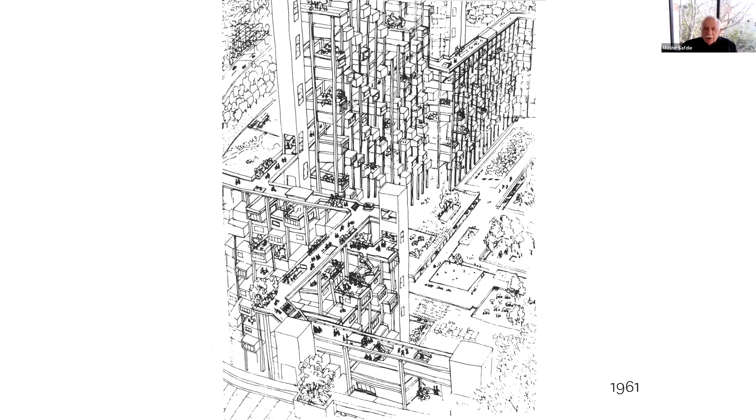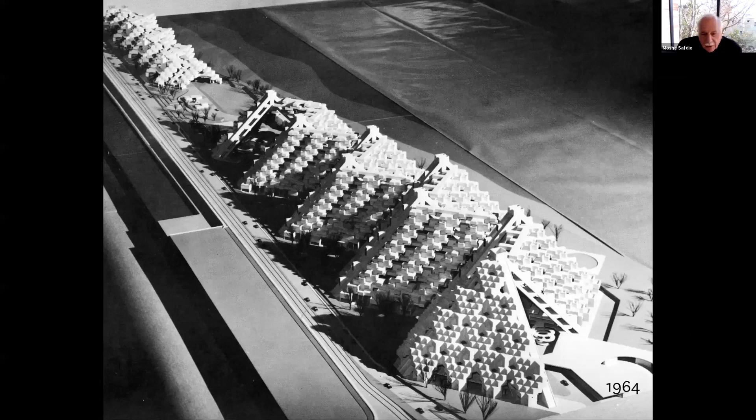I'll fast forward. After being briefly employed by my thesis advisor, Sandy Van Ginkel, I proceeded to Philadelphia to work for the great American architect Louis Kahn. While I was working there in 1963, Sandy Van Ginkel shows up and says there's going to be a World's Fair in Montreal, and he'd like me to come head the team that designs the master plan. I accepted, and with a bit of nerve said, I have one condition: I want to continue developing my thesis. Perhaps it can become an appropriate pavilion for the World's Fair.

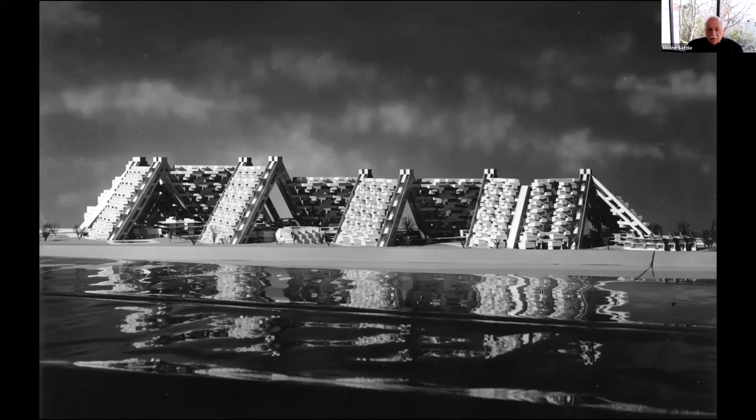I returned and worked on the master plan, and in parallel, using funding from the cement companies, working overtime at night, we developed the original habitat proposal, which you see here, of the entire Cité du Havre in Montreal becoming a community of 1,200 families, rising 25 stories in a series of inclined membranes of housing, terraced housing, with the underside being the public realm with schools, some office space, and shops. Expo management was excited about it.

Off we went to Ottawa to present it to the cabinet. The idea was that there would be a tax break for the developer who builds it as research, but that was not forthcoming. So the cabinet decided we can't build the whole thing, we don't have time, but we're going to give you $15 million to build whatever you can.

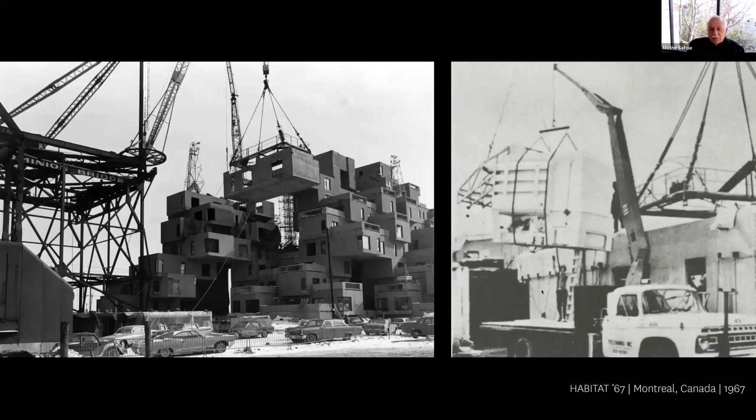Believe it or not, I was deeply disappointed and almost didn't want to do it at all, but I came to my senses by evening. We realized that $5 million of that 15 would go to build a factory to make the modules, but we revised the scheme to 150 stacked apartments, ranging in size. You see here the box being lifted in place, and also the prefabricated bathroom, which we designed, going into place. There were prefabricated kitchens too.

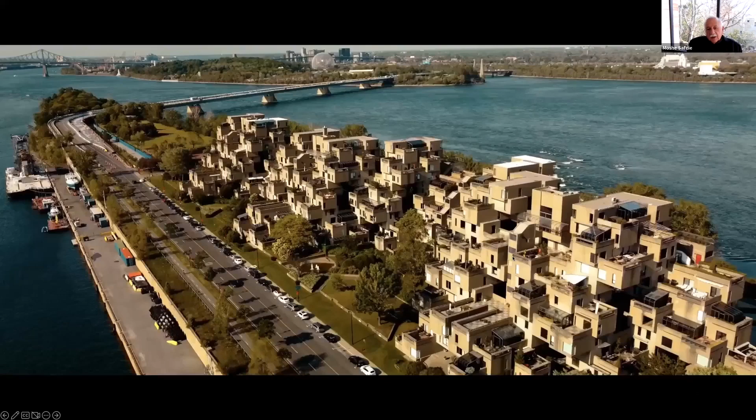And here it is today, 60 years later, almost. It's a heritage building today. It's a very cohesive community. One thing that Habitat has proven is that it is a desirable place to live in.

There's been many utopian housing projects built over the 20th and 21st century, and many of them, maybe most of them, proved to be dystopian in the way it worked out in terms of living in them. I think one thing about Habitat is that it is a project that has actually proven to be very desirable from the point of view of urban dwellers.

But we went through several years following that with many commissions—New York, Puerto Rico, Washington, US government—designing habitats that were not realized, in the 1970s and early 1980s. The question was, were these ideas either not realizable on a mass basis, or did they not jive with the economic realities of housing? There was a tendency to say this was one of a kind, interesting, but that's it.

This was—I'll just show you a few images of the building today. It is in remarkably good shape for a 60-year-old aging lady. Concrete in our climate has its challenges, but you see it here with the patina of life. People have modified the units and adapted them, and you certainly have the feeling of the kind of richness that comes out of the usage of the building.

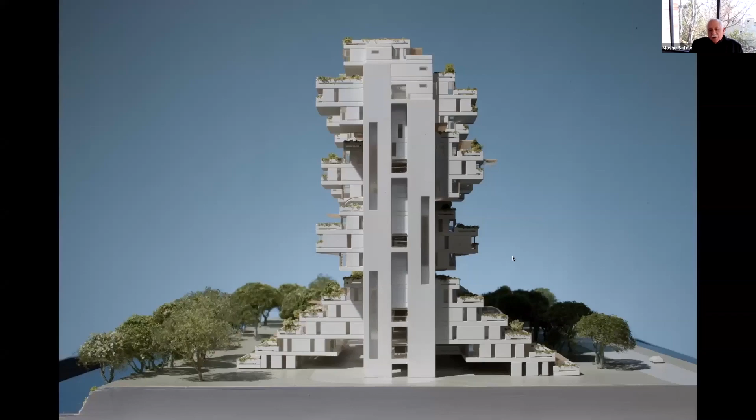So what would we do today as we were addressing this? This shows you the dozens of models that we made exploring multiple concepts and systems, and I'll show you a couple of those as they emerge.

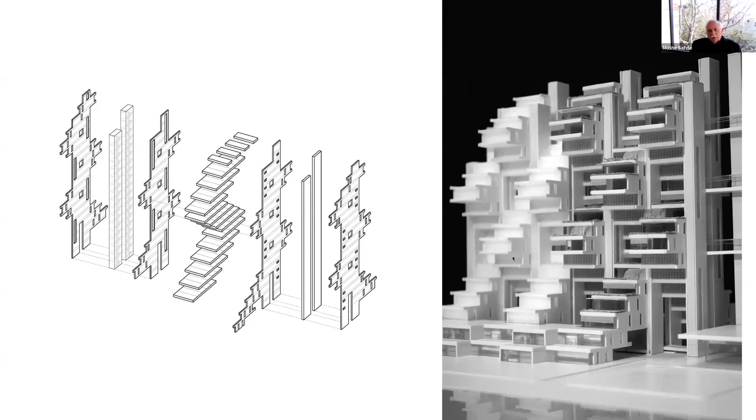One approach was: can we simplify habitat into a vertical structure with vertical plumbing, none of the acrobatics of the original structure, and prefabricated out of panels rather than boxes, and thus maybe achieve economies over what we had built in '67? This is the rendering of the possible building that would emerge, where most units or all units still have gardens, still have multiple orientations, but certainly a much simpler and easier building to build. We were hoping that we could achieve economies by this kind of simplification.

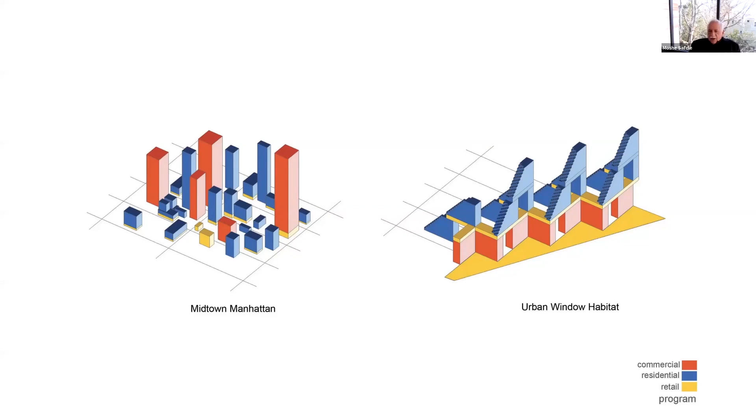So on the right, you see a diagram which shows you office structures in red, retail at ground level and mid-level in the building, and then this is a 75-story structure with terraced housing and hotels and other urban uses above, translating into this model, which shows you a permeable structure with these large urban windows, which would prevent this from becoming a wall in the city.

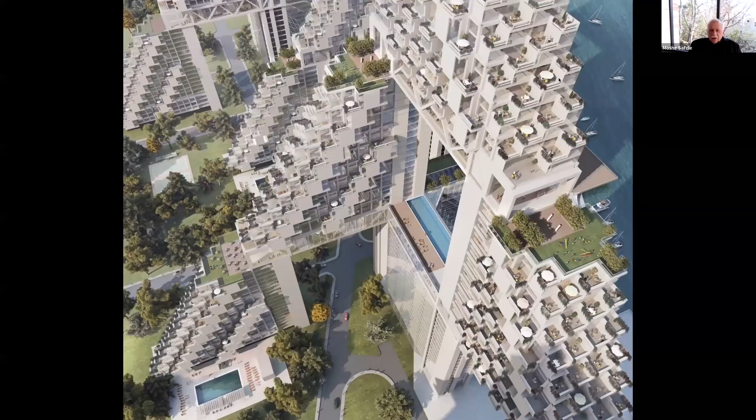Say if it was built along a river or Central Park, you could still have permeability through it. And yet many large, expansive spaces of the public realm on the various levels—you see here the terracing for the apartments and the balconies, and the large playgrounds and public areas on the 25th and 50th level serve the community.

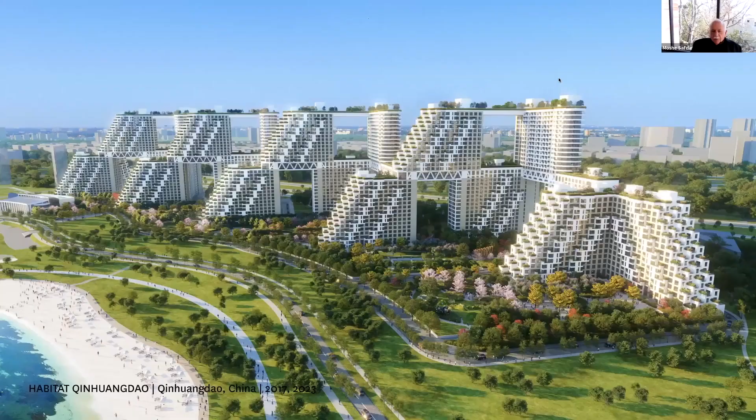This was a demonstration that you could achieve much higher densities and mixed use and still have quality of life—habitat on steroids in a more intense urban setting. What was fascinating is that in the years that followed there was renewed interest in housing that went beyond the standard apartment building, and our own office was commissioned so that many projects spun off from that research into real life.

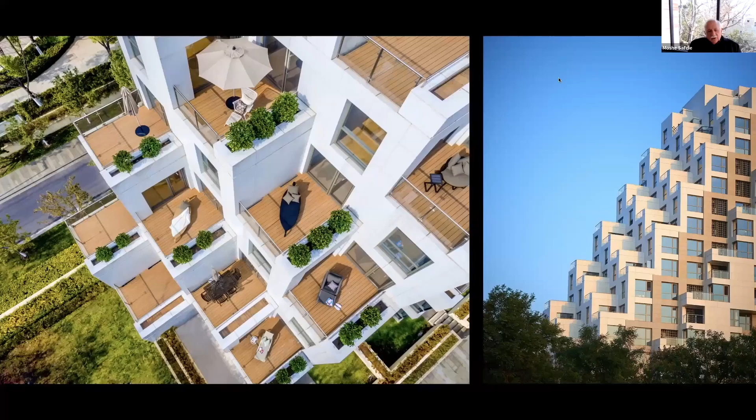This is Qinhuangdao in China, a coastal city near Beijing. This project is being built for a developer, Kerry Development Group, which owns the Shangri-La Hotel, and this is middle-income housing. We built the first section about 6-7 years ago, which is totally sold out and inhabited. We're currently doubling the complex, so there'll be some 6,000 apartments along the coast, terracing. It's conventionally built, not prefabricated, and yet we've managed to achieve a quality of life that transcends the standard apartment projects in China—it's a major departure in terms of what it offers.

One way to see how your projects are doing these days is to go to Instagram and TikTok and see what the residents are posting and saying about where they're living. So this is a little collection of that kind of life in the project.

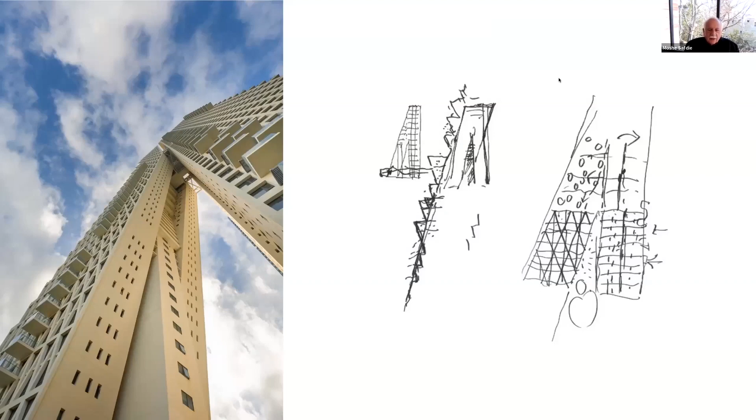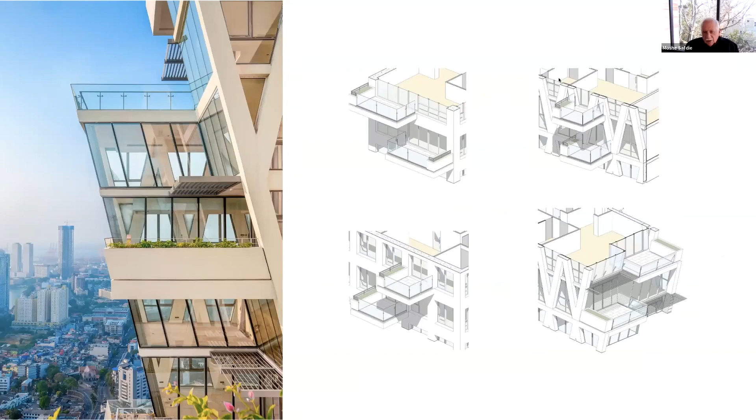Also in Asia, in Colombo, Sri Lanka, we've just completed a structure that rises 65 stories high with terraced apartments and some smaller units. It overlooks the city and the sea. You see here the cross-section, a photograph of the apartment, and a view of one of the apartments with its terraces overlooking the harbor. Again, in this case luxury housing, we've created an environment that transcends the norm.

I'll come back to Montreal and Habitat. As I mentioned, the provincial government declared Habitat, about 8 years ago, a heritage building. It also declared my own apartment interior, the one I lived in while still in Montreal, a heritage interior—except over the years, with several tenants I'd rented it to, it was not what it had been in '67. After it became a declared heritage building, I totally restored it back to exactly what it was in 1967. You see here the bare, unfurnished interiors, restoring even the fiberglass bathroom.

I felt that this unit should be part of the public realm, available for the public to visit. There's extraordinary demand all the time, not just from architects but people in general, to visit the place. So as part of my gifting of the archive to McGill, which has now been concluded, the apartment has become part of that collection at McGill. It'll be open to the public for visits, can be used for conferences, and can be used for visiting scholars. I hope that will help contribute to the promotion and dissemination of the idea to architects, students of architecture, and the public in general.

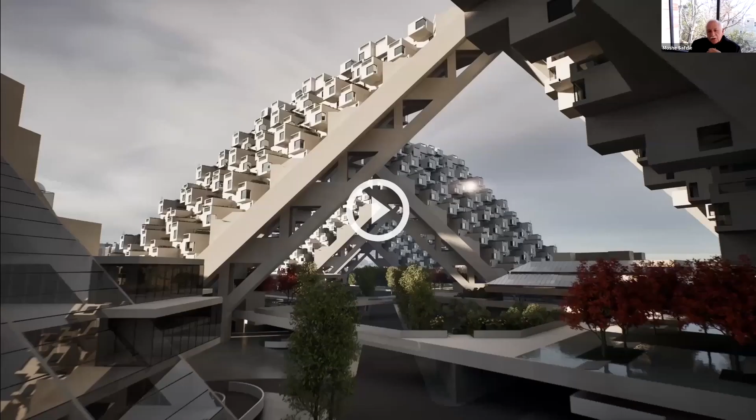And then coming full circle, we were approached a year ago by Epic Games. I don't know how many of you play video games—I discovered them when they approached us, because I'm beyond that generation of video games. But they suggested that they would digitize the original Habitat design, the one that was not built, into a virtual reality, making it available as a complete 3D virtual environment to their subscribers, so it becomes a setting for their games.

Working with them over a year, we digitized the project that was actually done conventionally with hand drawings. When we did Habitat, there was no computers whatsoever, nor for drawing it up. But as it became digitized, it became possible for them to also go further.

What I'll be showing you now is a clip which is in progress. It's not yet complete, where it will become completely detailed, including the interior of apartments. So their subscribers could walk around the project, walk into different apartments, and imagine their own worlds and events as they become part of that reality. Let's run it.

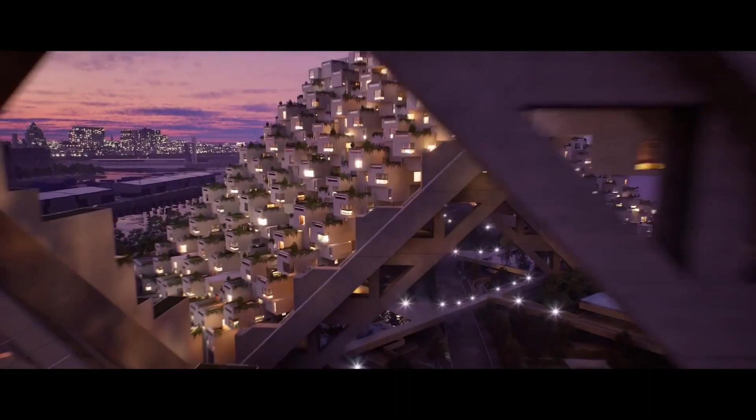So we have here a 60 year old concept, which if built today, I think would be considered timely and avant-garde. So maybe we still will get it built now that we have it in virtual reality.

Well, how much fun is that? I mean, would you ever imagine that you would have Epic Games approaching you, and in this day and age, putting what your original concept was into something that everybody could see?

I mean, I not only didn't imagine, of course we didn't know that such tools would be available when we designed Habitat, but even today, in terms of our work, we do a lot of 3D imaging. But this kind of virtual reality, you're seeing it on the screen, but eventually you'll be having your goggles and you'll actually be walking around there. This is like mind-boggling to me.

It is mind-boggling. And I had the pleasure of going through the archives the other day, looking at some of the drawings and sketches and your thesis. As you said, there weren't computers then, so everything was done by hand. And the other thing I found interesting was that really what you're showing us today is captured in the archives. They're there at McGill and for all to see if you wish. Anyway, we'll get to that later with Tellina.

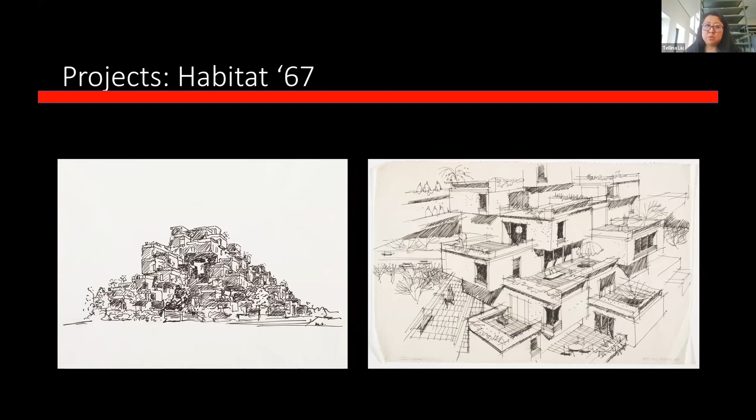One of Safdie's landmark projects is, of course, Habitat 67, and we have extensive documentation of it in the archive - approximately 150 folders of architectural drawings and sketches alone, plus other formats including project files, photographs, and models.

Here are additional drawings of Habitat, including one of the original proposals seen on the left. As an archivist and one-time architecture student, the presence of early concept sketches and drawings is incredibly valuable for students, providing a glimpse into the architect's design process. These materials show that architectural design results from an iterative process, and that changes are part of an architect's career.

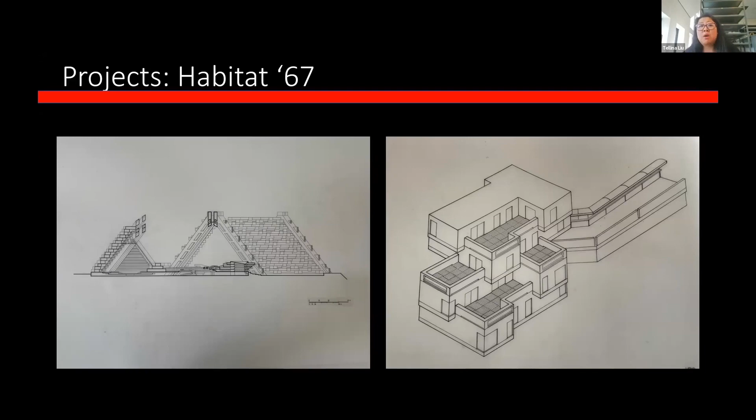Beyond Habitat, we also have other project documentation. One of the major projects in the collection is the National Gallery located in Ottawa, represented in multiple formats including sketches and models.

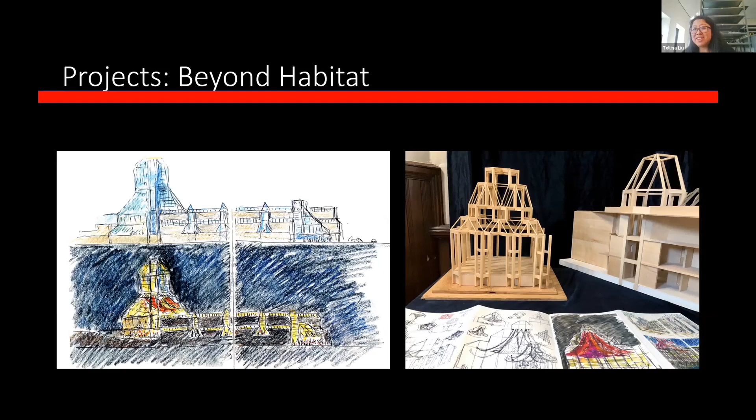The collection also contains documentation for unbuilt projects, like the drawing and model seen here. These materials are from the Frobisher Bay Housing Project for the Inuit community, and this major project by Safdie shows the importance of archival documentation and collections.

Having archival materials for unbuilt projects provides a fuller and more complete understanding of a designer's architectural career. As I learn and discover more about the Safdie Archive, I'm interested in increasing the awareness of and use of all of the projects here, including the lesser known buildings and unbuilt sites.

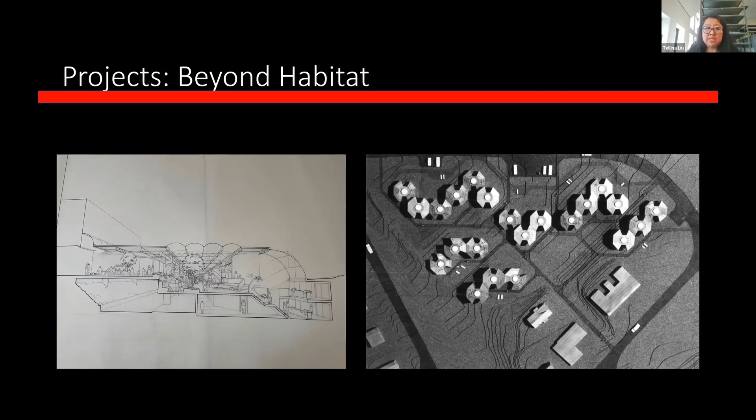A major focus for any archivist is to provide access and promote collection use. An access point into the collection is the Moshe Safdie Archive website shown here. This can be accessed through McGill's website or via search engine.

The website acts as a digital finding aid, and researchers can browse by project or explore project themes. Each project contains a description and images, and if the archival materials are currently here at McGill, users can also see the formats and the number of items available to view in the archive.

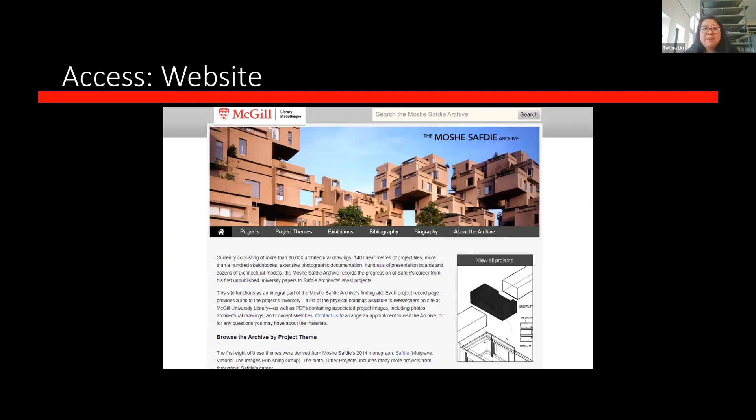McGill is a research institution and university, and as such, we want to ensure that students are made aware of our collections and are able to access them. To do that, we work with different departments and faculty here at McGill.

This semester, we collaborated with Safdie Architects to provide digital access for the Telfair Museum of Art in Savannah, Georgia, for a class on digital representation. This collection isn't here at McGill yet, and so the collaboration with Safdie Architects was crucial.

And just last week, we provided a tour of the Safdie Archive to undergraduate students studying architectural history here at McGill in the School of Architecture.

Exhibits are another way to increase the reach of the archives, and colleagues prior to my tenure here have included Safdie Archive materials in exhibitions held on campus.

A touchscreen display was also part of that exhibition, and visitors were able to view and interact with archival photographs from Habitat. Archivists are always thinking of new ways to promote collection materials, as well as how to utilize technology to increase user interactivity and to provide new access points into our holdings.

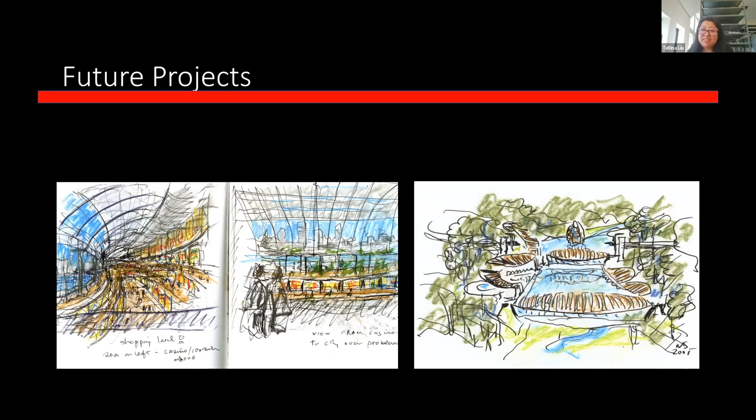Cynthia, I believe you're on mute. You'd think I'd learn by now, honestly.

This is so exciting, Tellina, and I can hear it in your voice, in the tone of your voice. There's the whole research role going forward that I wanted to ask you how you see that research role of the archives in the future, because it's even beyond the students themselves. I'll ask you my other question after.

Sure. I think the main focus is to provide research opportunities to students here at McGill in Montreal, but also in universities and locations beyond Canada. We are always open to researchers. I'm in communication with different faculty, and I'd like to potentially speak with faculty from different schools. I think we're considering collaboration with other institutions, digitizing more materials and making them accessible on the website so that students and researchers who can't make it to Montreal or McGill can access the materials digitally, to see the drawings and images of the models and other archival material online for their research. It's a lot of work and will take many steps, but I'm excited to expand on the work that's already happened and make it more widely accessible.